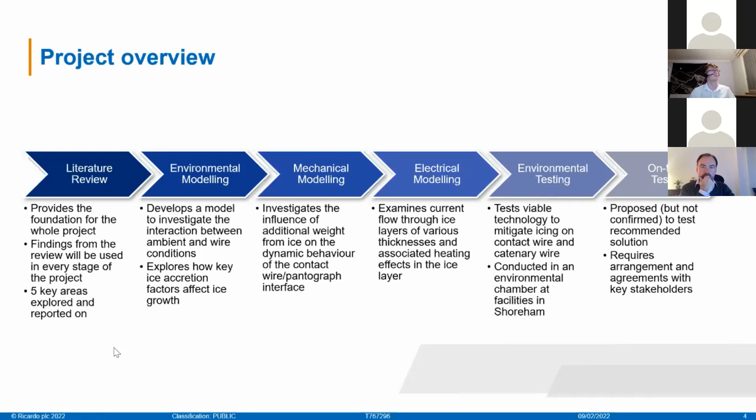So what I want to go through next is my role and processes for developing the literature review. The literature review was the first project that I really got stuck into back in September. We kicked off, I think it was the 21st of September. And so it threw me in at the deep end, really, and I had to figure out where to go.

The second priority was identifying any relevant practices and experiences from the rail operators. And then finally, we wanted to identify relevant input data for the modelling stages that I mentioned in the previous slide. So once I went through all of these information sources, we dumped them in a matrix, as most engineers do, and commented next to relevant questions that we wanted to answer. We had 5 or 6 key areas of interest that we really wanted to look into.

And then finally, the report was written and presented to the client and the steering group, feedback was received, and we did a bit of an iterative cycle making sure that the client was happy and the steering group was happy.

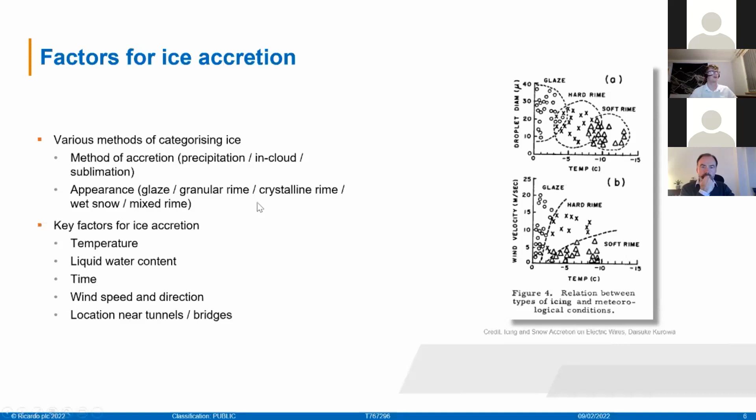Okay, so the consequences of ice is the next area that I looked at. Various consequences. Of note, abrasion: ice is typically quite rough, although slippery. It can form in irregular patterns and can lead to increased wear on the carbon strip. I'm going to just play this video as a bit of a point on the next section, if it loads. So electrical arcing, I'm sure most people are aware, is not ideal.

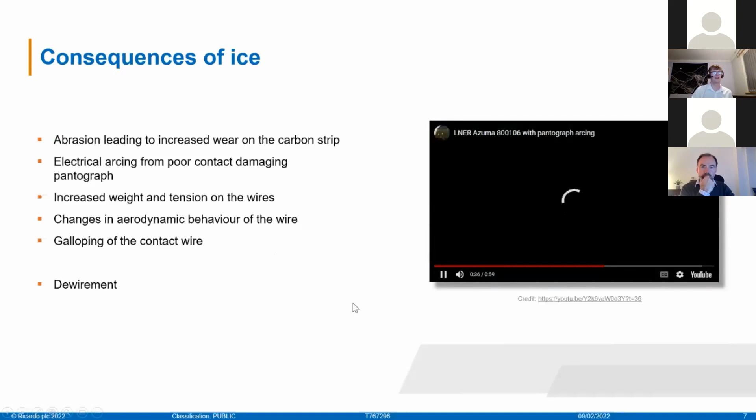I'm really hoping this video works, but if not, no worries.

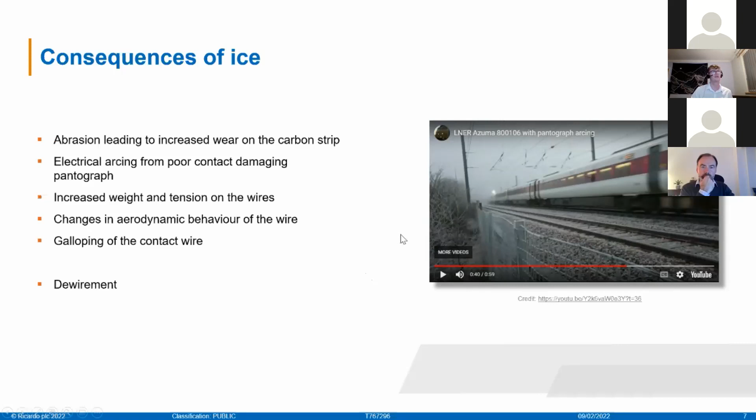As you saw from that clip, you can really see the impacts of the ice on the overhead contact wire. It's causing an arc to leap from the overhead line equipment. But of note, it's not leaping from the wire to the carbon strip. It's leaping from the overhead line to the aluminium carrier. And this is causing particular damage because it's up to 3,000 degrees Celsius, which is obviously melting the aluminium, melting the glue, and causing all sorts of nasty problems.

Other issues with ice on the wire: increased weight and tension on the wires, changes in aerodynamic behavior and kinematic behavior, as emphasized by the galloping of the contact wire, oscillations in the wire that shouldn't really be there. And all of these can help contribute to potential dewirements, which are preferably to be avoided if we want a successful rail network.

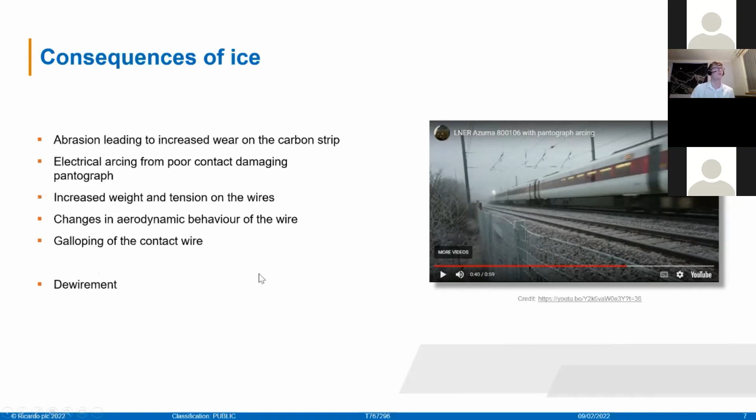Okay. So the next stage was looking at theoretical models. I found this a little bit less interesting because it was very academic. There are various papers, different modeling techniques. Imai, Goodwin, and Morrison are the three primary models for ice accretion. These are primarily from power networks, power supply grids, because icing isn't just a railway problem; it's a problem worldwide and across sectors. I think Morrison has been working in Canada on their power grid there. Dynamic models for the pantograph contact wire interaction have also been found.

There are different methods of modeling ice, and there's also a Chinese paper with dynamic analysis of the pantograph catenary system, considering different ice coatings. Electrical modeling is notably more difficult because electrical properties tend to change with time. When an arc is created, there are drastically different conditions from when it propagates, even down to the millisecond of when it's leaping. But we did find some electrical properties, and there are some models that can predict critical flashover.

Okay. I'm just conscious of time.

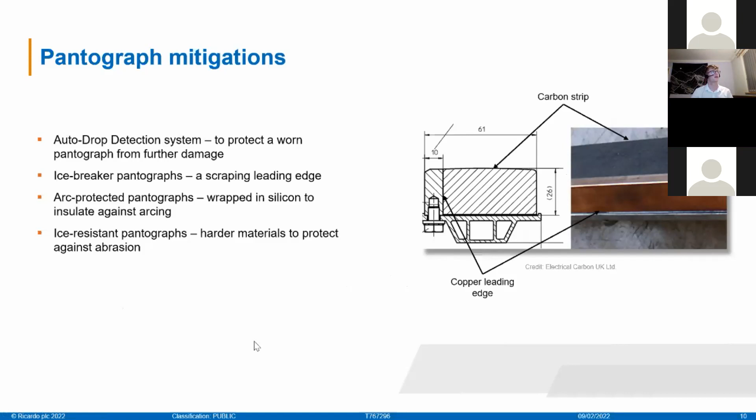Okay, so that goes over the results from the literature review. The next steps, I touched on it a little bit earlier, but we've finished the literature review. The project steering group is going to be meeting soon to discuss the environmental modelling and the progress that's been made, and that's going to enable the mechanical modelling to occur, because we want the results from the environmental modelling to be used as inputs for the mechanical modelling.

As I mentioned as well, the environmental chamber testing has been completed. What we've done is we've taken what we've learned from the literature review, and we've tested some anti-icing products, but I can't go into too much detail because that's not been reviewed by the client. We are in the process of drafting said report.

Okay, and then closing up the presentation, some of the personal challenges that I've found with this project: with me being a year in industry student, I'm only an intern and therefore have very little experience with the rail network. So this was kind of trial by fire, or trial by ice even, I should say. Other challenges include looking to impress new colleagues. The new kid on the block has taken this on and tried to use it so that colleagues can say, oh, James works hard, that kind of thing. But they're more personal challenges.

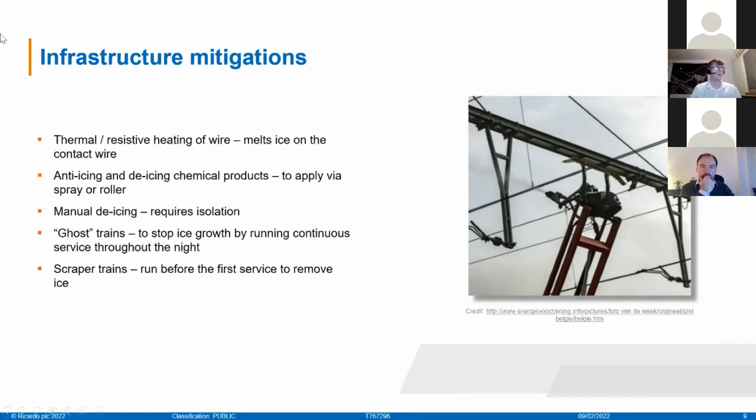Perfect. I think that answers that perfectly there. And we have the last one from Liam Purcell. James mentioned 3 types of modelling work. What is the relevance of these 3 different disciplines to this project? Sorry, could you repeat the question? I think my internet was breaking up a little bit. At the bottom, it's written down. Or Liam, do you want to unmute yourself? I think I've unmuted myself. Yep. You mentioned 3 different types of modelling work. Yep. Electrical, mechanical, and environmental. What is the relevance of these three different disciplines to this project?

Yeah, so great question, Liam. Environmental modelling is really to get a basis and an understanding of how ice develops on the contact wire. What we've seen in a lot of our literature is that icing has really been studied on power lines, whereas the contact wire has a bit of a unique geometry, and it's typically different to the literature that we've seen. So we wanted to get a firm understanding of how it develops, particularly on the contact wire. This environmental model is then used to fuel the mechanical model.

And so the mechanical model is really to understand how the quality of the current collection is affected by ice on the overhead line equipment, with your standard, not standard metrics, but with outputs being percentage contact time and average contact force. The electrical modelling is to analyse how the electric current runs through the ice layer, to see the impact on that. Does that answer your question, Liam? Yes, thank you, James. Brilliant, thanks.

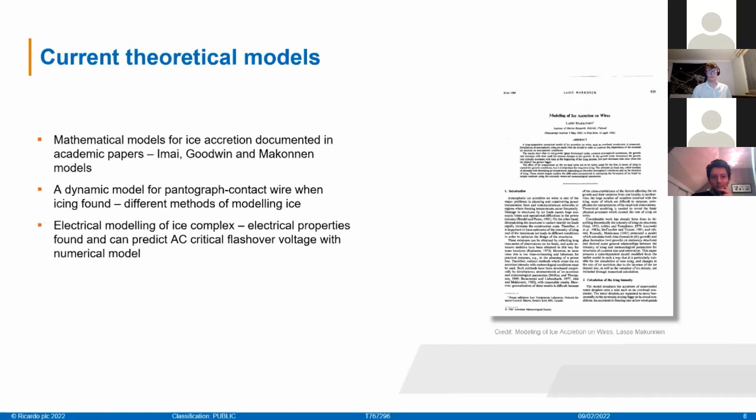Oh, perfect. Thanks for those, James. Yeah, really interesting presentation. And I'll definitely be looking at the report online for more information, because that's something that I've never considered. Ice on the overhead line. I've always considered snow and ice on the tracks, but never above my head. No, it's quite interesting actually, because I live by Nottingham trams, and so in the winter you do hear the sparks of arcing, even on the tram network. But yeah, quite right, Tom.

Next up, we have Thomas Bell, who's going to present on introducing 3D printing to rail operators.

Thank you, Tom. Bear with me 1 second while I share my screen. I think I've... There we go. Yep, that's come up. Excellent.

Right. Well, hello, everyone. As Tom said, I'm Thomas Bell. I'm a mechanical engineer with ESG. Been there since coming out of university, which was in the summer of 2018, so getting close to 4 years now. Here to tell you about bringing 3D printing to rail operators across the UK. I thought I'd give you a bit more of a personal perspective on what it was like for me coming out of university, what challenges I faced, what I managed to get done, rather than giving you the sales pitch, which I'm sure a fair few of you will have already heard countless times if you're professional engineers.

So my background, like I mentioned, went into ESG straight out of university. I was a Master's of Mechanical Engineering at Sheffield University. I did a lot around new technologies. I looked into condition monitoring. I did a lot around additive manufacturing, 3D printing. Top picture there is my thesis, which was inkjet printing a transistor. Below that, you've got something which I was studying in my lectures, which is laser melting raw elements to form eutectic alloys, which then gives you various advantages when it comes to latent thermal stresses.

So ESG hired me because of that kind of background, because they wanted someone for their new technologies team who'd be able to bring that kind of thinking to the company. I've now moved on to a more generalist role, as most people often do, get involved with larger projects. But 3D printing is really where I cut my teeth as a professional engineer.

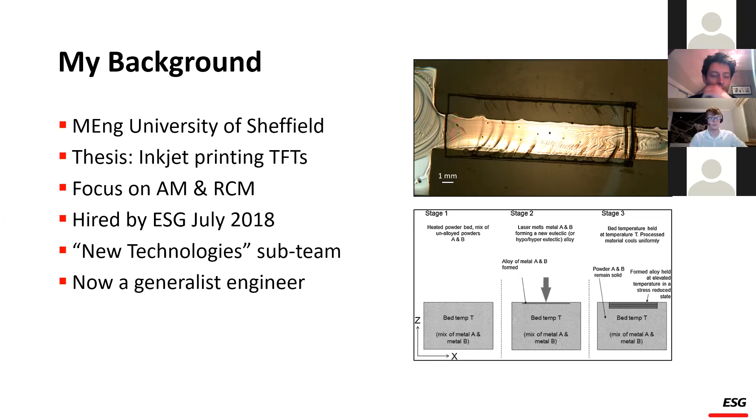The reason ESG hired me: in 2018, this is kind of where ESG stood with 3D printing. A large 3D printer manufacturer called Stratasys were pushing hard to get into the railways, presumably trying to sell people printers, not realizing that the UK railways are very fragmented and very few companies can afford to spend 6 figures on a 3D printer. But nonetheless, they caught my manager's attention, mostly because they'd already secured fire compliance ratings for their plastics.

And when I joined, the picture on the right is the kind of stuff we were doing. So this is something that Stratasys made for us. We gave them the 3D model for an armrest, I think out of the class 15X. They printed it and gave it this fancy looking, slightly funky surface finish. Unfortunately, once we cut that part apart to investigate it, we found that they'd given it a very hollow filling on the inside, which meant that it didn't comply with structural standards in any way.

So you had Stratasys, who lacked the rail industry knowledge. You had ESG and my boss Martin, who were very keyed into the railways and really could see the opportunities that 3D printing could bring us as a consultancy, but didn't have that fundamental academic knowledge of 3D printing, and that's why I was brought in.

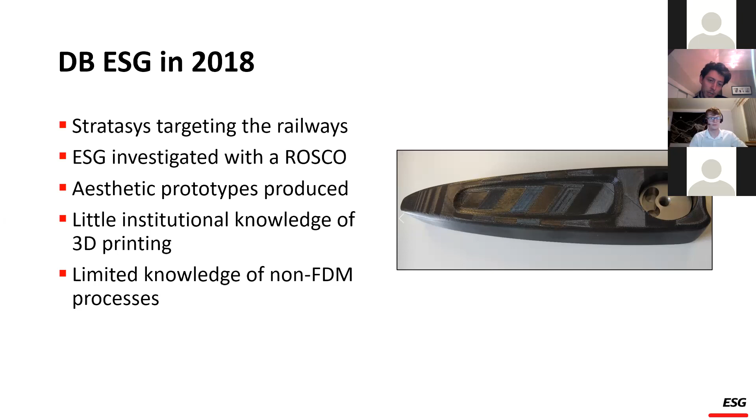So very quickly, why a rail consultancy would be interested in 3D printing. The top image is the kind of stuff you see in press releases, at least those intended for the layman, around 3D printing. You often see highly optimized complex geometries, titanium alloys, the kind of stuff that's used in, say, the aero industry, where you actually are willing to spend a lot of money to shave a few grams off a part to optimize it, etc. Frankly, it's not of much interest in the rail industry, which is much more conservative.

Where we saw the real value in 3D printing was in the digital manufacturing process. The idea was, say you have an obsolete part which you can't get mass-produced or stocked anymore. Well, it's actually quite easy to reverse engineer it. And once you have a 3D model to produce it using 3D printing technologies, you don't have to worry about the time you spend on drawings. You don't have to worry about tooling costs and other setup costs of manufacturing it by conventional means. You just 3D print it as needed, and you don't need to hold stocks of some mass-produced parts.

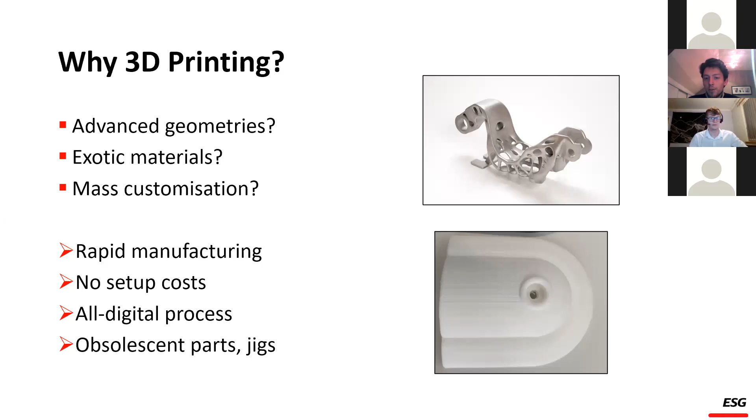And before I go into the exact work I did around 3D printing, I'll just give you a tiny bit of background, but I'm conscious of the time limits. Very quickly, basics of 3D printing. To the left, you've got the FDM process, which is probably the best understood. It has a lot of advantages, but good surface finish is not one of them. That's basically just depositing a molten plastic filament onto a build platform, layer by layer, and those layers slowly build up to give you a complete part.

In the center, you've got laser sintering, which is starting with very, very fine, loose plastic or metal powder and melting it into place using lasers. Again, layer by layer. Advantages, you get much better surface finish. Disadvantages is typically costs and a more limited material choice.

Then on the right, you've got either DLP or SLA printing, depending on who you ask. But this is UV curing a resin using laser beams. That gives you excellent finish, but the main issue you have with that is, given that you're relying on a UV curing process, you're very, very limited when it comes to materials. This one on the right is basically unused outside of prototyping, at least in any kind of serious industrial application.

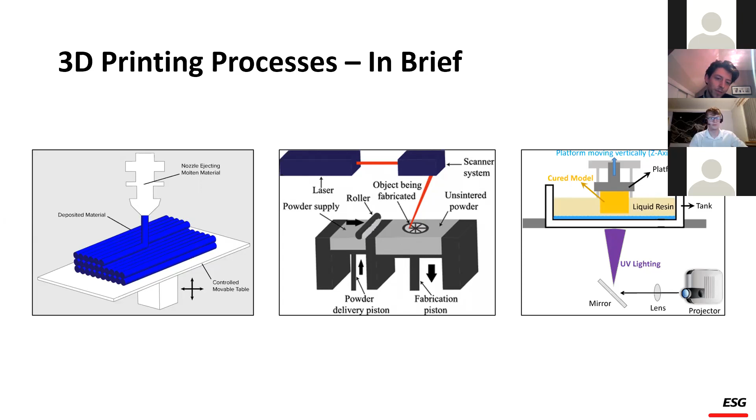So joining ESG, obviously 3D printing was still at the R&D stage for us. So this is what I was focused on for perhaps the first year or so. The first order of business was, as soon as I was informed that one of the parts we were looking at was armrests, grab handles, and so on, all parts which are subject to structural standards, my biggest concern was immediately fatigue life. Like I said, FDM printing, which is what Stratasys was selling, is built layer by layer.

That results in a highly anisotropic material, to use the correct term, meaning that it's much stronger in one direction along the layers than it is in the other direction across the layers, especially in fatigue rather than just ultimate strength. That was a big issue. We ultimately resolved that simply by accepting that we'd take the conservative approach and saying all our FEA analysis will be done assuming the worst case strength in all directions. We looked at specialist software. We eventually made the call that it simply wasn't worth the expense and the extra bother during the FEA stage.

Fire compliance is a big topic. Like I say, Stratasys and their material, they'd already certified it. We knew that was compliant to requirement set 1, if anyone in the audience is familiar with EN 45545. But there was also a focus on finding other materials that were perhaps cheaper, perhaps gave you a better finish, like using laser sintering, which also met some kind of a requirement set, say requirement set 22 or 24.

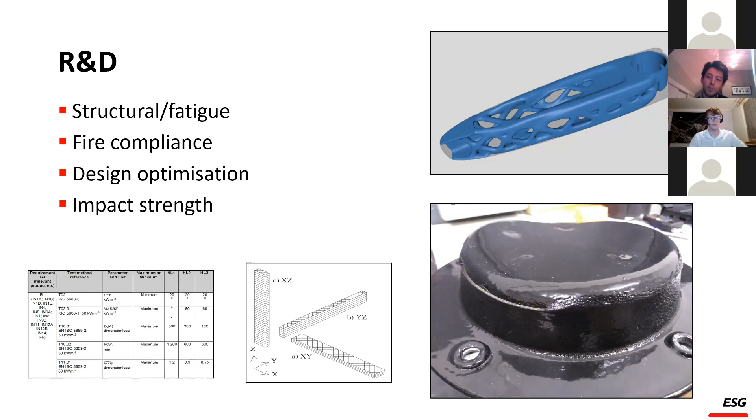Bottom right picture is some impact testing we did. So this was an FDM part, which we coated with a polyurea polyurethane blend as a coating. The idea was not only to clean up the finish, but also to give it extra impact strength. This part is a prototype axle box cover, which we took to a rail windscreen testing rig, where it had small projectiles thrown at it at up to 125 miles an hour to see how it held up. And as you can see from the picture, it did fairly well. So out of a material that is fairly brittle originally, that doesn't have much elongation at break, we managed to get a decent bit of toughness out of it.

We eventually had to essentially come to a compromise and just accept that there'd be a lot of expense in sanding down parts where we needed to use Ultem, this highly fire-compliant material. In other cases where we can get away with less, the focus has been since then to simply use different processes, different materials that give you a better surface finish.

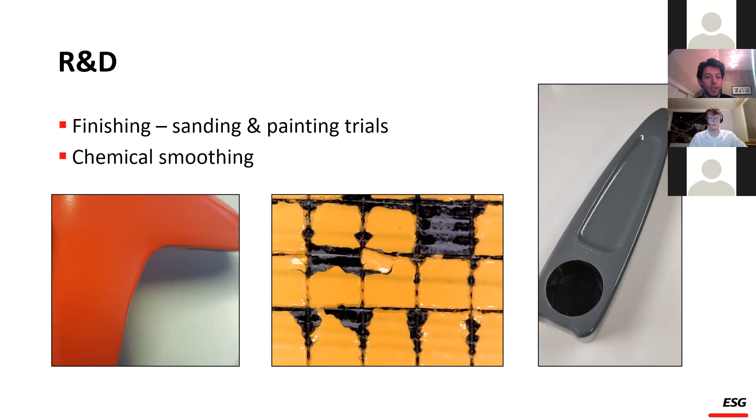First issue we encountered was we had some small metal inserts that slotted into the main plastic body, which you could then screw into. You don't want to be screwing straight into 3D printed plastic. Those inserts were originally designed to be circular in cross-section to prevent stress concentrations in the plastic body of the grab handle. That made them very hard to fit properly in the right direction because all the surfaces are slightly angled and it has to all come together just right. So we designed the inserts again and obviously had to redesign and reprint the handle as well.

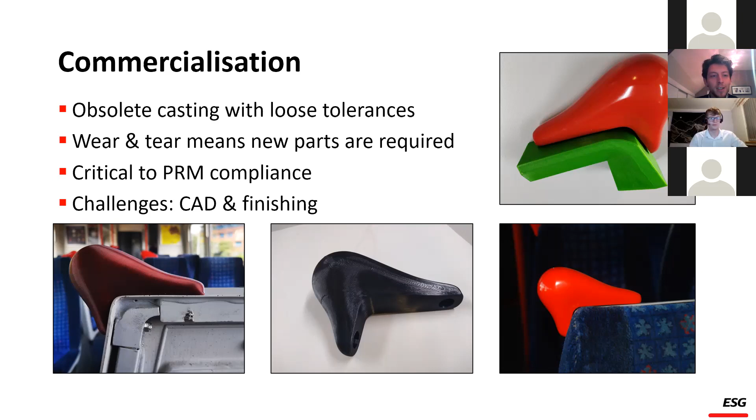We expanded into CNC as well because we realized we could use the same digital manufacturing process with CNC machining just the same. We could still work on a purely digital basis. We could still do 3D scanning. We could still give our suppliers digital files, not have to draw them up, but we could also get fairly cheap metal parts using CNC.

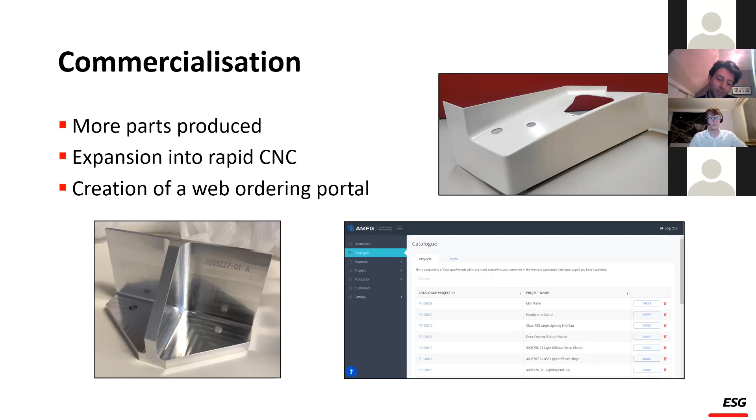But the thing I'm happiest about really is how 3D printing was integrated into our business as a whole. Shortly after our big success in introducing these parts on Chiltern trains, I was asked to present to the entirety of our engineering and projects teams, just to explain to them what 3D printing was, what it could offer, and why we'd been looking into it as a business, why it was so interesting. And the result of that has been very, very good. I had a number of projects engineers come up to me and thank me. And the perspective has definitely changed.

It's now really quite common to be in a meeting with customers discussing something completely unrelated to 3D printing. And then we'll just say, oh, well, we could use, say, a space envelope model for something. Why don't we 3D print it? Client shows interest. We bring out some example 3D printed part we made a few months ago. And their eyes light up because a lot of people don't realize how much you can get out of 3D printing nowadays.

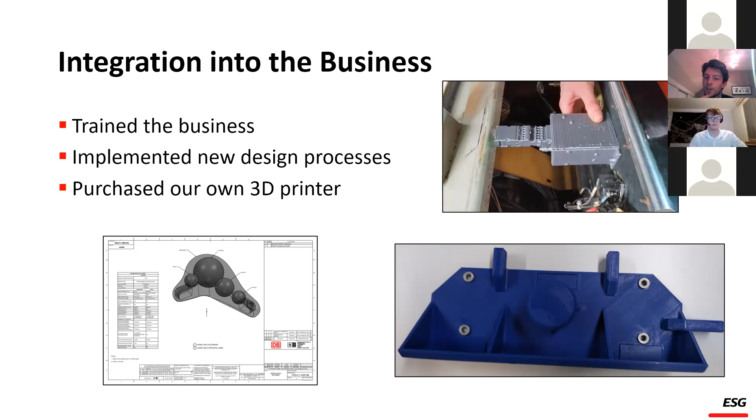It was something that made me very happy because it's not something that I had to notice myself. My colleagues came to me and said, we're having this issue. The small plastic part is breaking over and over again. Can we 3D print it? Of course we can. I took the part, gave it to a grad who was working in our design office. He reverse engineered it. We had a 3D model.

Two or three prototyping runs later, which cost us all £50 each, we had a clip that fits perfectly, which I was able to take on the train while I was on site visits, looking after my main order of business, this modification work, until we got just the right fit, until the fluorescent tubes clipped in place perfectly.